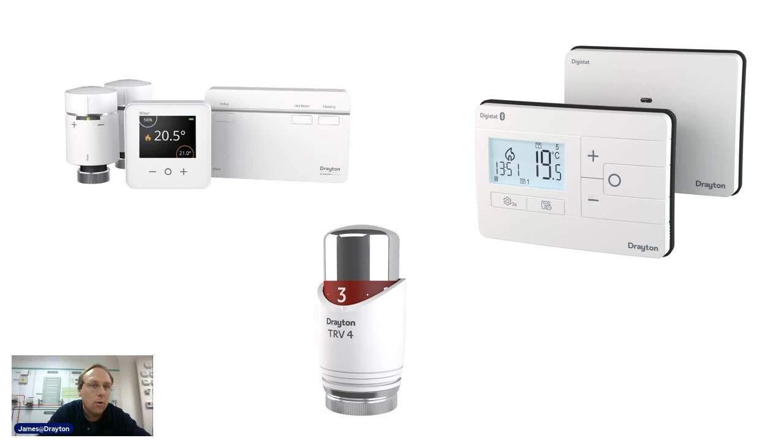But essentially, everybody will recognize the RTS range on the left there. That's an energy class 1 thermostat. So to get your 12% saving, you want to be moving away from a class 1, which is essentially an on-off. So the temperature rises, it hits set point, it turns off. The inertia from a heating system is probably going to overshoot that, and then it will start to undershoot.

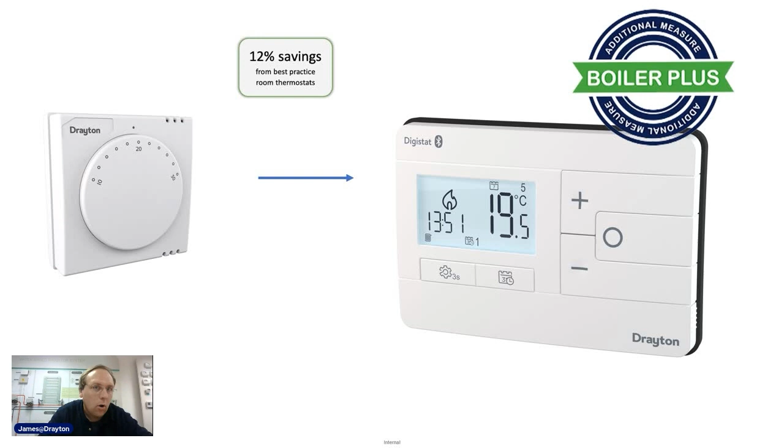So the next one is individual room control. Now, when I first heard this, I immediately thought, oh, smart TRVs? But it doesn't actually mean that. It means just having individual control in the room. So you're not reliant on just a timer and a room stat to control your heating. You've got individual room controls by way of TRVs.

Now, it's highly likely that these are going to be mandated. But there's a possible 19% saving if you fit just standard mechanical TRVs to your system. Obviously, if you go for the smart TRVs, then you've got that saving, but you've also got an added level of comfort where you can go through and you can set each zone differently should you wish to.

So, but when you think about it, you always assume that people have got TRVs, but the number of houses you go to and you see that it's incomplete, or that they're not bothering with TRVs and they're just letting it bounce either on the room stat or the timer. There's quite a significant saving to be made there, and this all really plays into the fact that obviously there's the whole green agenda where we really need to be reducing our usage.

But I think really what's going to drive that is the fact that the energy prices are set to rise by estimates of up to 50%. And that's normally what gets people going if it starts to cost them more money. So you can see that, by relatively low investment, by using mechanical TRVs, you're able to get quite a significant saving, particularly if your energy bills are going to rise.

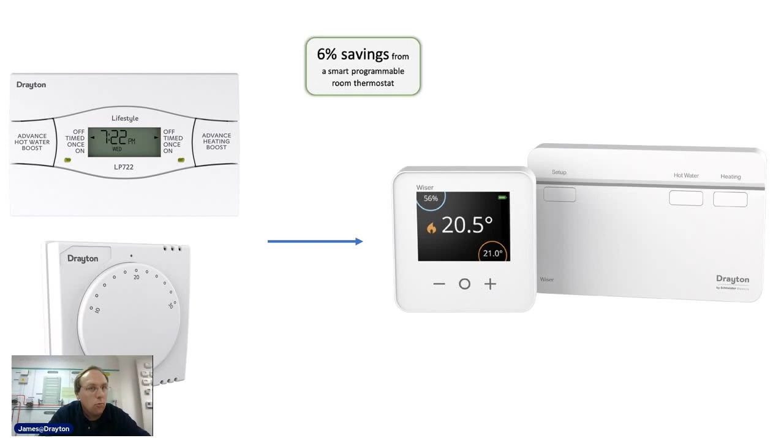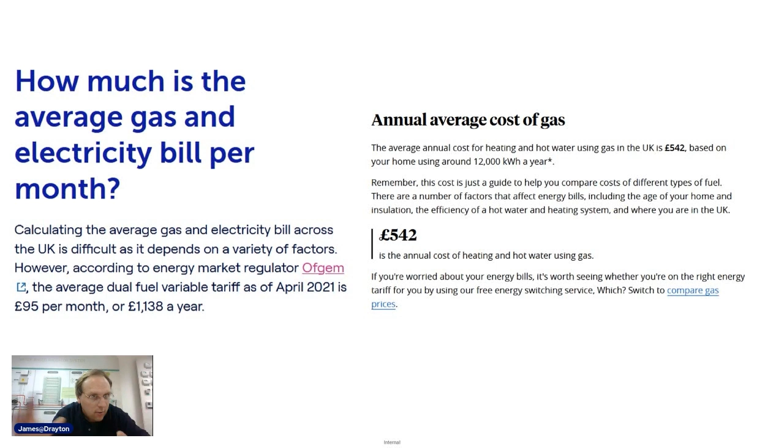So it's difficult really to talk in terms of what this actually means in numbers, but average cost of energy there, the dual fuel plan is 1138, 542 is typically what you'll pay for gas. But remember that could be about to rise by 50%. So all the stuff that we're talking about here to drive as much efficiency out of our heating systems is as much about what we can save in terms of money, as well as trying to be more sustainable and make sure that the resources are being used most effectively, and we're reducing the total through not having so much wastage.

So another one that's a common thing, something that's getting a bit more momentum now, is flow temperatures. Like I alluded to at the start, when we start looking at moving over to any sort of heat pump, then the flow temperature is dramatically reduced. It doesn't have to be, but if you want to drive anything like a 300% coefficient of performance, you need to get your flow temperature down much further than what we would typically have with a gas boiler. But that said, you can still drive more efficiency out of your gas boiler if you drop your flow temperature.

So you can see this graph here. Now, the important thing is we always want to strive to have our return temperature below the dew point, which is 54 degrees, because if we can ensure that what's coming back to the boiler is below 54 degrees, the boiler will run in condensing mode. And that's where we can then start to push the efficiencies up to around 89, into the 90-odd percent.

So the more we keep it outside of the hotter, if you like, our return temperature that's coming back, the less efficient our condensing boilers are going to be. But you can see here, most people have their flow temperature around maybe 65, 70 degrees, but that's giving you, assuming you can get your delta T of around 20, where it's going out at 70 and coming back at 50, so you're below that 54, an efficiency of around 86, 87%.

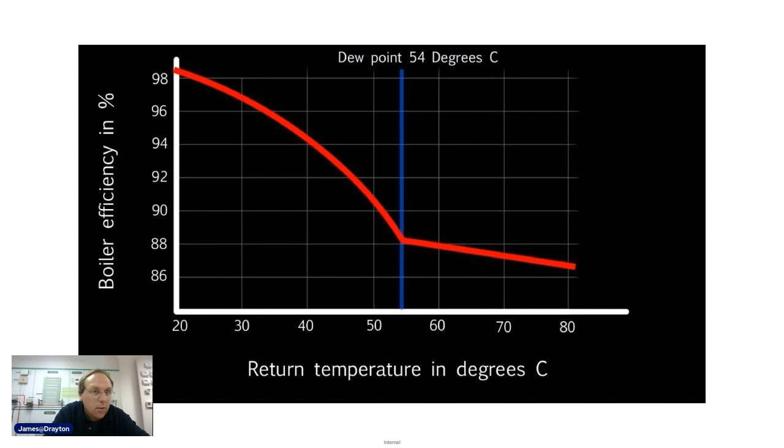But again, easy thing to do, doesn't cost any money, you're not having to fit anything, but a graph like this really brings home how by just knocking, say, 5 degrees off of your flow temperature that's leaving the boiler, that's going to then impact the return temperature, and then what that's going to do to your efficiency.

So you're going to be using the relay terminals on the backplate going out to drive whatever it is, maybe direct connection to the boiler if it's a combi, or through a suite of zone valves if you've got that sort of system. But the important thing I'm going to draw your attention to here is where it says the source type. Now, we've got it set as a gas boiler. If you don't do anything, it stays defaulted at gas. Your options in there are oil, gas, electric, and heat pump.

And what that does is you're not just aligning it to whatever boiler that you've got. What you're actually doing by defining those parameters is determining the cycle rate of your modulation. So like I said before, that's the way that we control so that we don't just have the boiler on until we hit set point, and you get a massive overshoot, and then it starts to drop, and you get this really big swing around set point.

The way we stop doing that is we don't have the boiler on all the time. So we've got thermal profiling that's going on within the control. So it's learning how quickly the room or the environment it's in gains or loses heat. But then coupled with that, we can then modulate the boiler based on time.

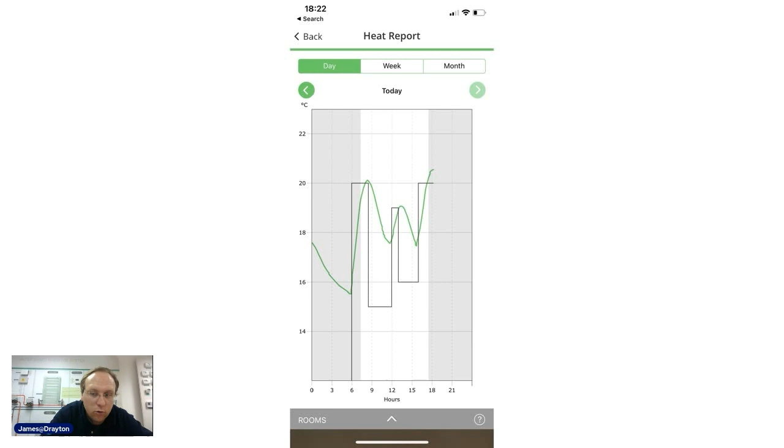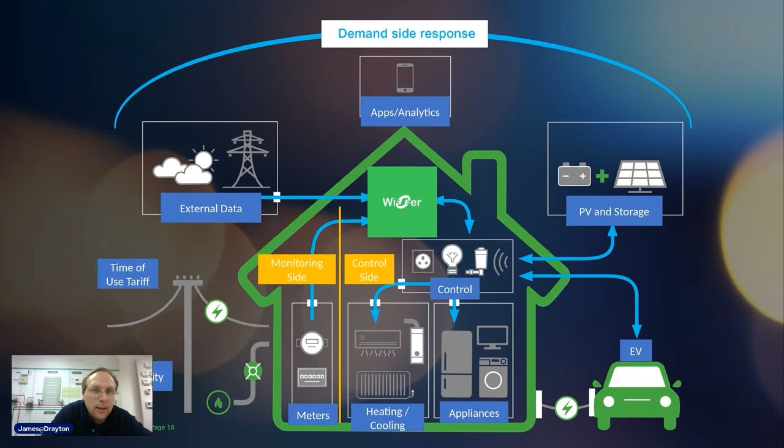Well, this home energy management system that you see in the center, which is an integral part of this system here, to manage all of the different things going on in the home, that essentially is what WiSER is going to become. So like I say, whilst we're looking at the heating load, heating is one of the most expensive things you can spend in terms of energy cost in the home. This is why, by having it on the WiSER platform, ultimately you're going to be able to manage all of these different things through the home energy management system, which is WiSER.

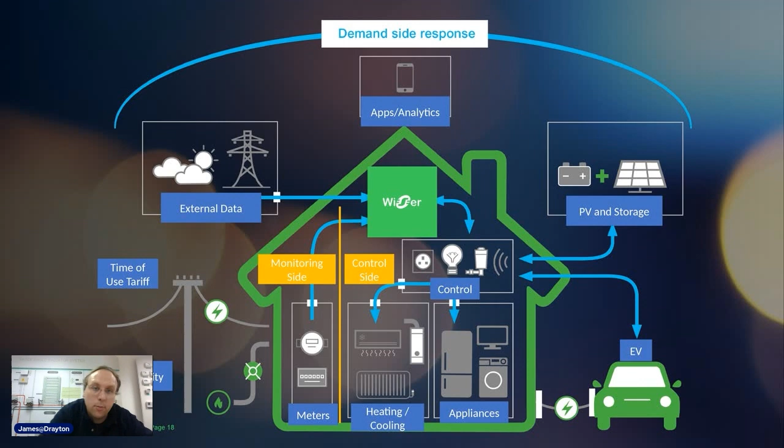Now, I'll come on to the questions. So a question came in. Let me just refresh my memory on this a minute. So a question came in on the promo video yesterday, and it's with regard to priority domestic hot water. So everybody, I'll just give you a bit of background on what this is.

So everybody's sort of familiar with things like S-plan and Y-plan systems, where you've got motorized valves controlling flow into the different circuits and consequently firing the boiler. Now, the problem is that those sort of systems are a little bit archaic in so much as they're left over from when we used to have non-condensing boilers. But again, this thing about having your return temperature below 54 degrees, below the dew point, is fine pretty much for your central heating system, because we spend a lot of effort trying to balance the system.

And what we're trying to do there is we're trying to make sure that all of the radiators are pretty much the same resistance to flow, so that the water that's leaving the boiler on the flow is emitting that heat into the room effectively. It's not being robbed by any one particular radiator, and then it comes back on the return with a delta T of about 20 degrees.

Now, the problem we've got with something like an S-plan system is most installers don't tend to bother putting any sort of valve to throttle down the flow on the return from the hot water. So when you call for hot water, the flow tends to race through the indirect coil in the middle of the cylinder, and before the cylinder is actually up to temperature, the return is up close to what the flow is, which again, if it's above 54 degrees, we're immediately in that non-condensing state, so things aren't working very well.

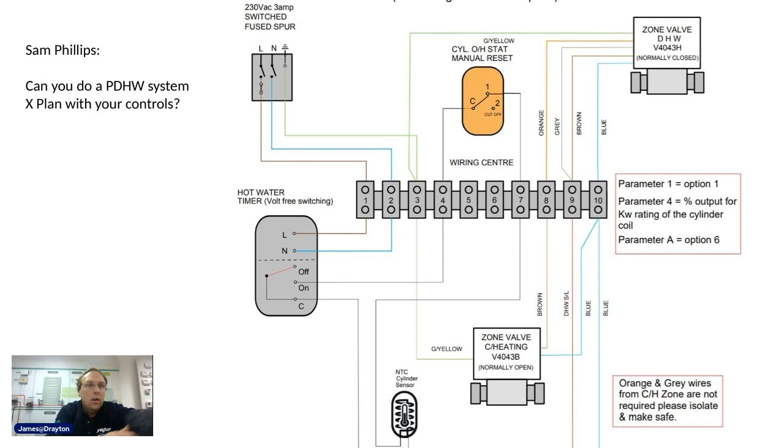So I think what we're going to see is much more prevalence of boilers that have the capability to give two different flow temperatures for two different circuits. And the consequence of that is obviously you need to have the controls that are able to support that. So at the moment, I guess you could probably rig it whereby you invert your control theory so that you keep a normally closed valve open all the time, but it's certainly not an elegant way of doing things. So I hope that answers your question. Not at the moment, but I'm pretty sure that's going to be something that we will be looking at as we move away from the traditional S-plan and Y-plan.

Now, you may have noticed that I haven't really mentioned OpenTherm all the way through what I've been talking about tonight in terms of energy efficiency. I'm sure if you've been on the group, you've probably seen the comments that have been made about OpenTherm. So I really just wanted to clear up what's going on with OpenTherm in terms of Wiser. So Wiser is OpenTherm compliant, in so much as we are part of the OpenTherm Alliance. Despite its name, in order to be able to produce these products, you've got to be part of the OpenTherm Alliance. And Wiser is OpenTherm compliant in so much as when you call for heat, the percentage demand that's calculated by the hub is converted into a flow temperature that's requested from the boiler.

So the Intergas boilers that we've got here that we developed this with, that works absolutely fine. Your demand fluctuates the flow temperature based on the parameters that you set on the boiler. Now, the challenge that we've got at the moment is that a lot of boiler manufacturers have set their boilers up whereby they're OpenTherm compliant, but as soon as you connect an OpenTherm control to it, it locks out the panel on the boiler with the expectation that all the stuff you would be doing on the boiler panel, you can now do from within the control. And that's where we get the issue, because obviously you can't.